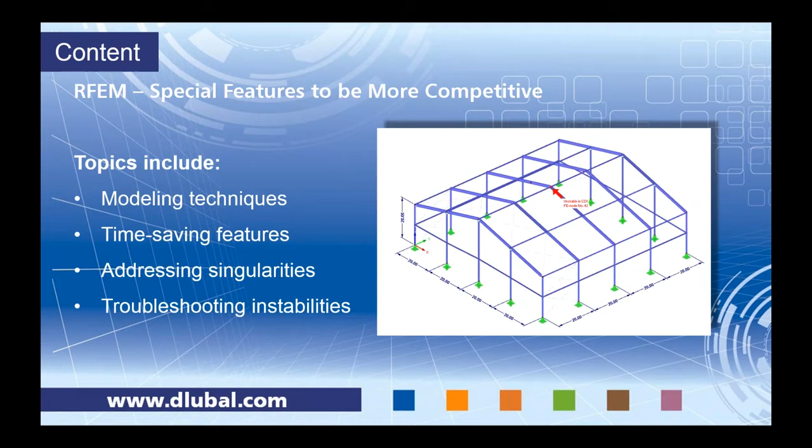I don't think there's a single engineer out there who has modeled that hasn't encountered an instability of some sort. So today I just want to show you some features in RFEM that I think help you troubleshoot these instabilities and overcome them quickly.

So for our first example today, I just have a simple frame here. If I scroll in, you can see our W shapes for our columns, W shapes for our beams, nothing too elaborate. It's restrained in the out of plane direction. And I went ahead and applied some line loads here.

Dead load, we have 3 kips per foot. Live load, 2 kips per foot. And then I went ahead and put a wind load, a lateral load of 1 kip per foot on the structure. You'll also see here I have some load combinations that were just created according to the ASCE 7 using these 3 load cases. And then I also have my result combination. Result combination is nothing more than an envelope solution to give you the max and mins for all the load combinations that I have specified from the ASCE 7.

So with this result combination, I want to go ahead and run an analysis, and it tells me that the results are not found, so it's going to go ahead and run through all of those load combinations. And if I take a look now, I have a results option down here at the bottom of my Project Navigator tab. This is where I can actually control what I see graphically from my results. You can see here that right now I have my moments in the local Y direction displayed.

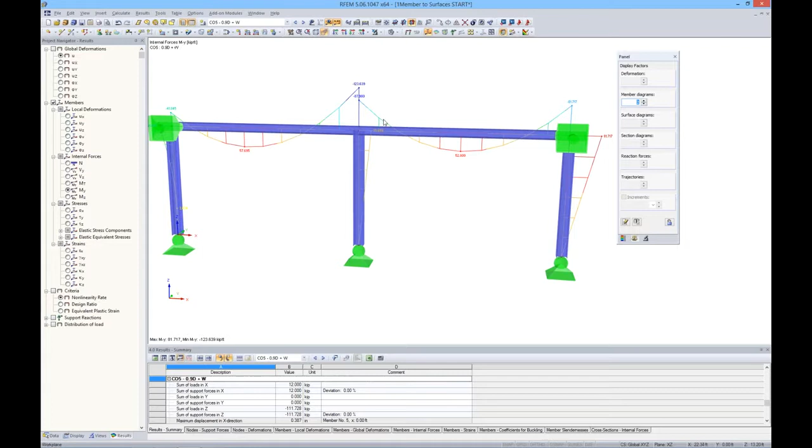We have a max and a min, and I can scroll through all of my load combinations here, and it updates according to which load combination was shown. I can increase my member diagrams here so you can see them a little more clearly, and we can take a look at our axial forces, maybe shears, and stresses here.

The other thing I utilize in this model is we have quite a few add-on modules. We have one called RF Steel Members, which is essentially a stress analysis of our steel members. I'm using the results from our result combination to get a stress ratio. You can see here that if I take a look at my colored panel list, my ratio is actually 1.11 at this intersection. For design purposes, this obviously is not okay. We can't have over 1.0, and in some cases maybe it's 0.8 or 0.9. You can see the rest of the beam is relatively okay, even at these other column locations at 0.75.

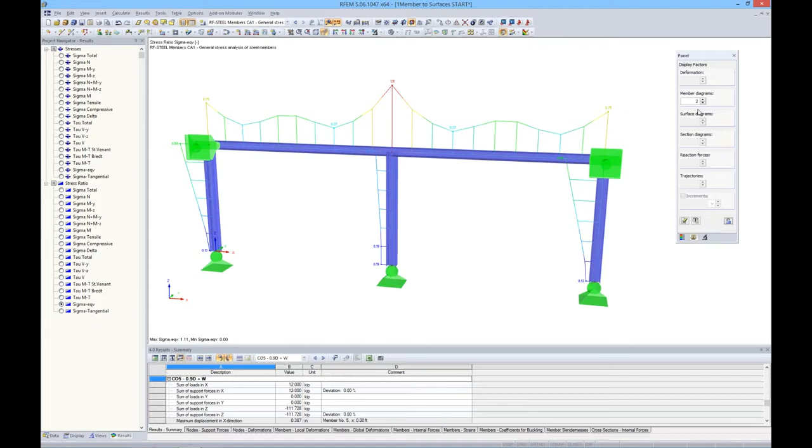If I decrease my member diagram, we can really see clearly where the problem area is. It's right at this intersection. So we have a couple options here. We can certainly increase the size of our members, but this can result in an over-conservative design because the only problem area is really this intersection here.

So what I'm going to propose is that we take a more detailed look at our intersection here with a finite element analysis. If I go into our wireframe view and turn off my results, we can see that our members are simply 1D elements. When you're drawing a member in the program, it will only be this line, which is the centroid of the section, as a 1D element.

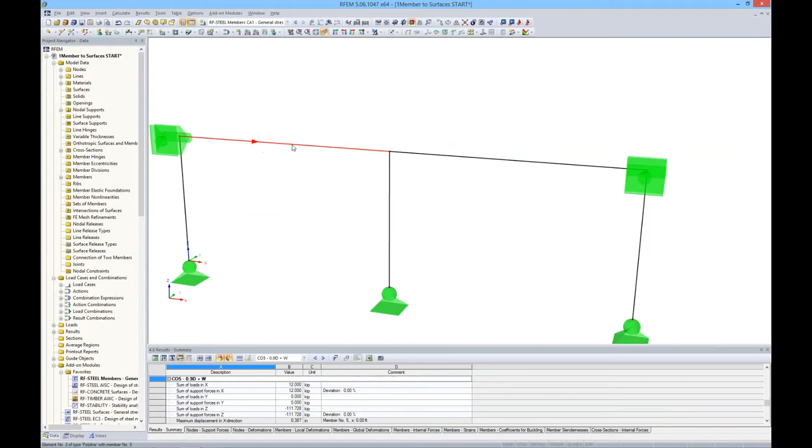I want to go ahead and divide this member here. All I need to do is right click on the member and go to divide member, and I have a few options here, but I want to divide by the distance. You'll notice this arrow here is going from left to right, so we know where the start and end of our beam is. I want to divide the member 2 feet from the end, and hit OK. Now you can see that I have 2 separate members.

You might be thinking, okay, what about the loads? What happens with the loads when you divide a member like this? You can see that the loads were also divided, but the program's smart enough to know to keep that value on the divided member as well.

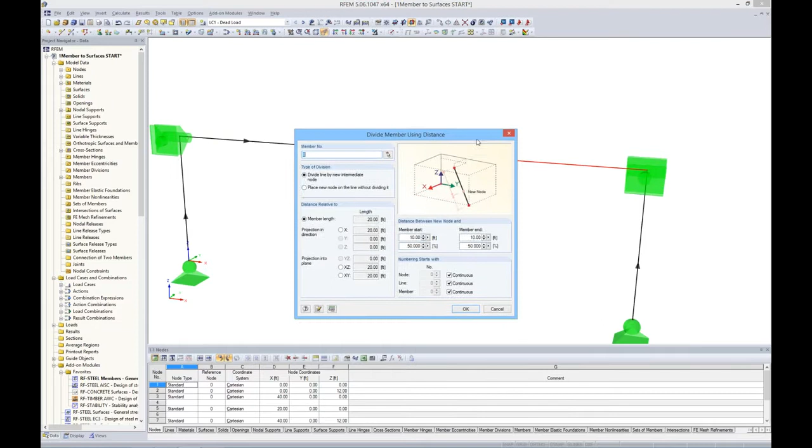So we want to do the same thing with this one. I will divide the member by end distance, and this time, because my arrow is going the other way, from start to end, I want to divide it from the member start by 2 feet. If I select this column and simply hit the enter key, the last dialog box will come up. That's just a quick tip rather than right-clicking on the member to pull up the dialog box again.

Now we have these 3 separate members right here. I'm going to render it again, and I'm going to select these. The selection is similar to AutoCAD: if I drag from left to right, it will only grab what's in that box. If I go from right to left, it will grab everything that box touches.

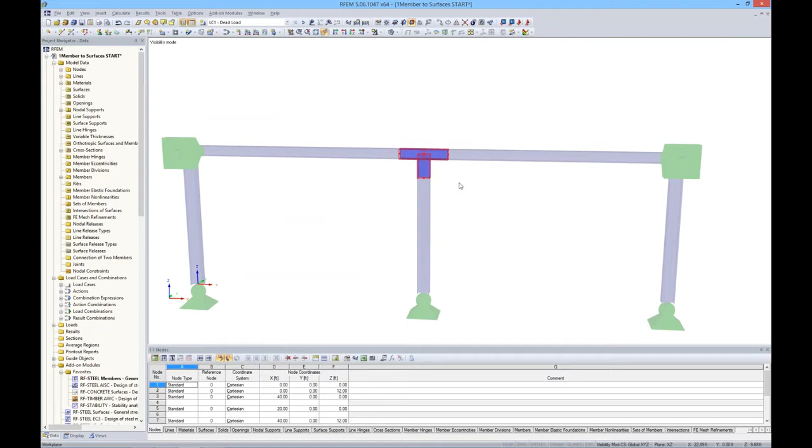For this case, I'm just going to select here, and I'm going to choose visibility by selected objects. Now I can no longer select anything other than these 3 elements that I specified before. This is a pretty powerful feature that RFEM has that I haven't seen too often. If I select my 1D members, right click, and go to my member, I can generate surfaces from members. Now you can see, let me put it in wireframe view, that these 1D elements are now surfaces.

So they're 2D elements now. If I go ahead and click on the web for this surface, you'll notice the thickness is 0.38, steel A992. All of this is taken directly from the section that you specified, the W shape.

If I go ahead and select a flange down here, the thickness is 0.63 inches. So again, everything was taken from that W shape.

So you might notice here that we have some geometry issues. Obviously, this is not valid. So we want to move the flanges of the column to the bottom flange of the beam. I'm just going to hold down my control button and select all of these nodes at once.

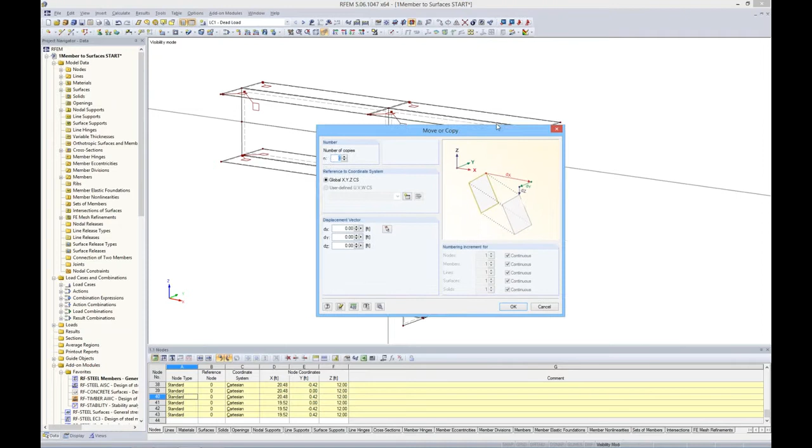I'm going to use our move copy tool, and I don't want any copies here, just moving. Typically I would need to know what this distance is to move these flanges down to the bottom flange of the beam. Maybe after a little while I could decide, okay, half the depth, take into account the thickness of the flange.

But instead, RFEM has this tool where we can select 2 points to actually get a displacement vector. So if I select from the top of the flange down to the bottom of this flange, you can see I now have a displacement vector on dx and dz. We will not be moving it in the dx direction, but only in dz. So I hit OK, and you'll notice that everything lines up quite nice.

Now, the other thing to consider is that we have this single point here where this 1D element is framing into the surface. This can actually cause a singularity. All of these forces are being transferred to this one particular point rather than being distributed over this entire surface. So what I want to do here is create a rigid plate at the end.

For our surfaces, if you go up to this button up here, you'll notice we have quite a few shapes you can choose from - donuts, semicircles, triangles, anything really, polygons - and the program will create this surface element and automatically mesh everything. There's no need to individually mesh the elements. Some other programs require you to tie nodes together, tie elements together, but the program will do this all automatically. So for this case, we're going to go ahead and choose polygon.

And for my stiffness, I'm going to choose rigid. Everything's grayed out because our stiffness is super high. So here we will just go ahead and draw our plate, and once we close the loop, we can see that we have a new element here.

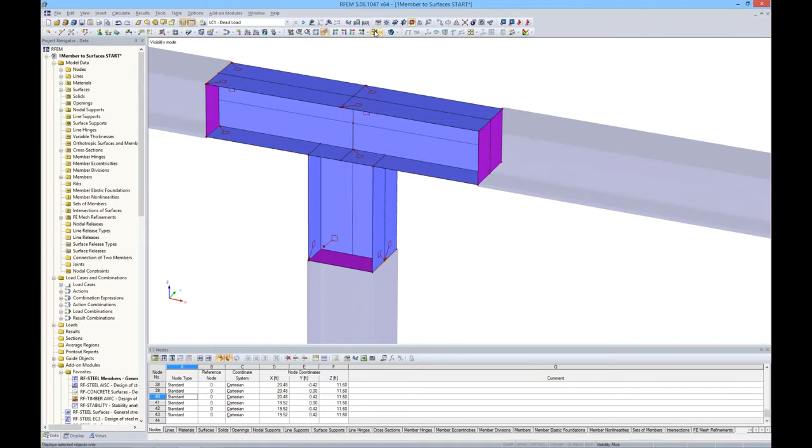We will do the same for this side, and lastly we want to do the same on the bottom of the column. And I right mouse click to get out of that dialog box. You can see now that if I go ahead and render my views and turn off my visibility mode, that everything lines up quite nicely.

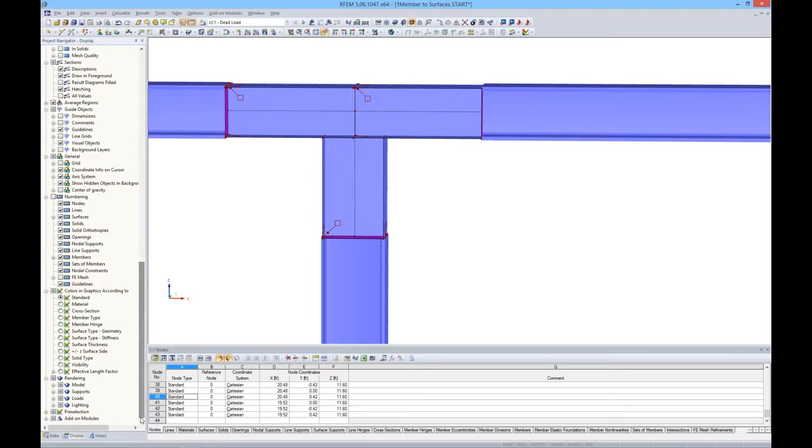Surfaces are only modeled at the center line of the thickness, so we do have the option in our display menu. This display menu is essentially everything you'll need to adjust your graphical view. If I scroll all the way down to the bottom, I have the choice for rendering the model, the solid model, surfaces, and I can actually fill including the thickness. Then if I zoom in, you can see that everything lines up with the 1D element to the surfaces.

I will go ahead and turn that off. Now the other thing I want to show you is the FE mesh. You can notice that the program has automatically inserted these refinements. For the sake of this purpose, I'm going to go back to our data and go ahead and delete these.

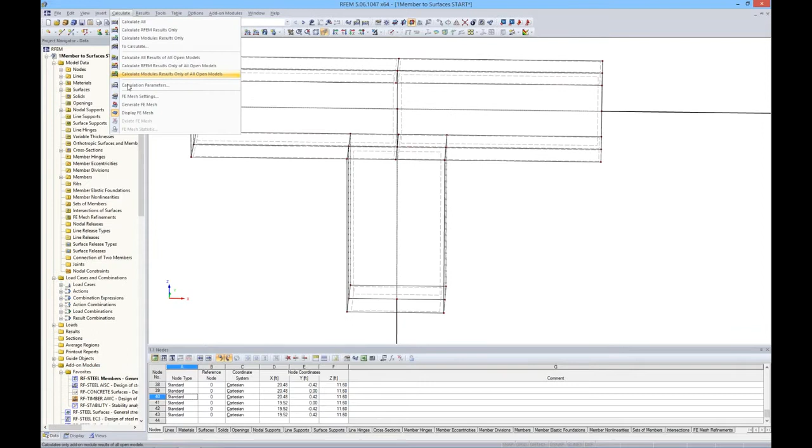Now, if I go to calculate FE mesh settings, and I think most people are familiar with this from FE analysis, you have to specify the length of your finite elements. Default is typically 1 foot. If I go ahead and generate that 1 foot, we can see that this is clearly too large for this situation - we only have one FE element for the entire width of this surface. So if we go to calculate FE mesh settings and change this to 0.1 and regenerate the model, we can see that this is much better.

The program ties all nodes and lines together automatically, so you don't need to worry about that. One last thing to consider is our loads.

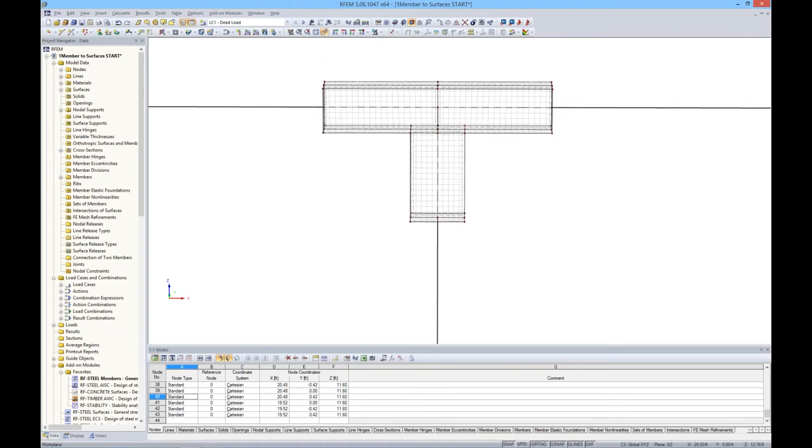For our dead load, as I mentioned before, we kept these 2 member loads, but in this case we don't have a member here anymore, we have a surface. So we need to delete these. I'll click on the load and delete them, and apply a line load instead.

A line load is very similar to a member load, except it can be applied to surfaces. So here we want to apply -3 kips per foot. I simply zoom in and click on my lines, and now you can see the 3 kips per foot has been added.

Now I want to adjust my live load. If I hold down the delete key and click on each load, that will also delete those loads.

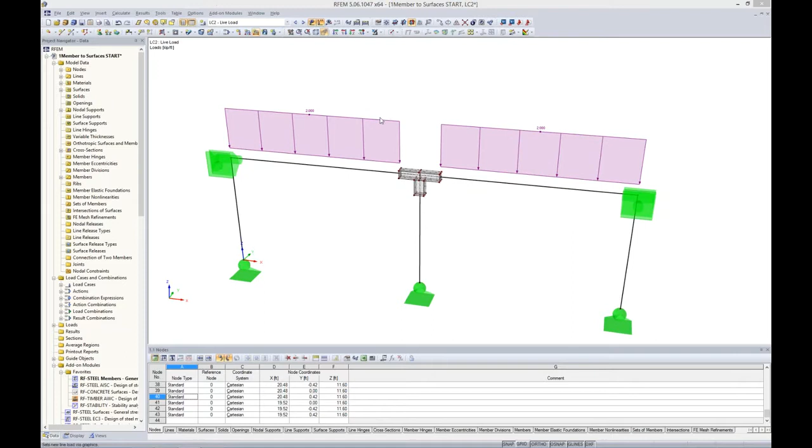Again I want to draw a line element, and because I'm in live load up here, that is the load case this load will be generated into. For this one, I'll specify it as -2 kips per foot. I just scroll in here, and now we have our loads.

I believe we're ready to run our analysis. I go to my result combination, and since results aren't found, our dialog box pops up. This will take slightly longer than our 1D elements because we now have the 2D surface elements, and you'll notice it's going through each iteration as the load increment increases.

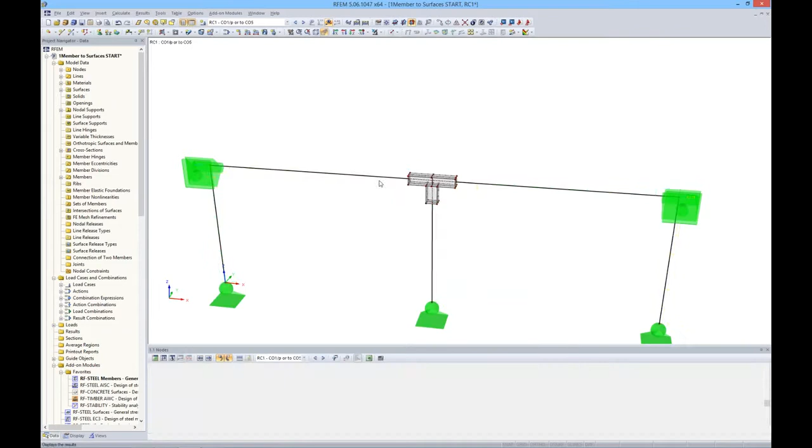So instead of the members, which you'll notice the member diagram stops short of those surface elements, that's fine, I'm going to turn that off and take a look at our surfaces. If I scroll in here, I can view all the different internal forces for the member, shears, moments, everything of the sort.

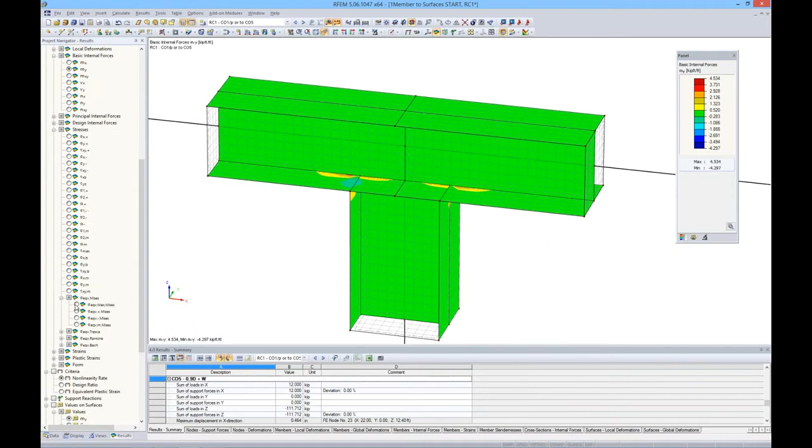What I'm really interested in is the stresses, so I'll view the von Mises stresses. Everything looks okay until I zoom into these points, where we can still see it's extremely overstressed.

So we have an option here where maybe we want to add a plate to this bottom flange, maybe an inch plate.

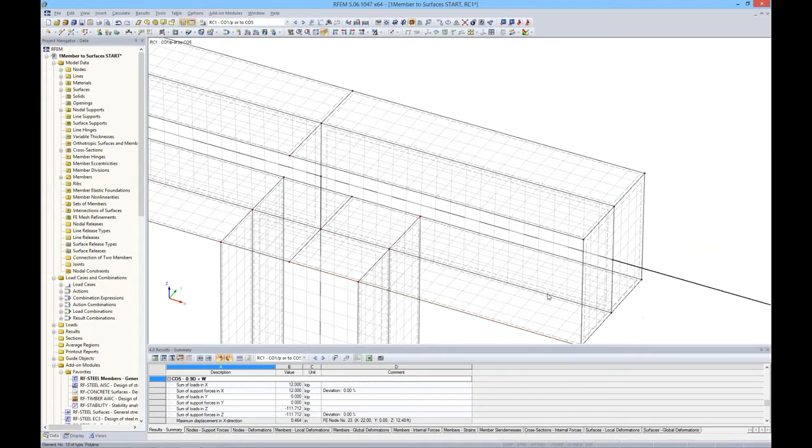If I turn off my results and hold down, select this surface, and hold the control key, I can select all of these bottom flanges. Now I can right click... oh sorry, I lost it, let me do that again.

Now I can right click, edit surface, and increase my thickness to 1 inch. In the rendered view, we won't see that unless we change it to the thickness under our display options, and you'll see it's slightly thicker than our 1D element, which is exactly what we want. I'll change it back to here.

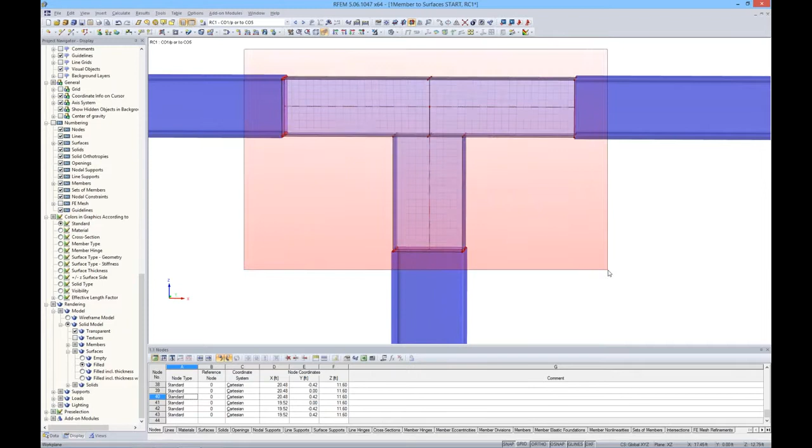Now the other option is to actually do a plastic analysis. With our add-on module, MatNL, which takes into account nonlinear materials, we can select all of these, right-click, edit our surface, and create a new material.

I go into my materials dialog box, and you can see the library is full of quite a few materials. We can filter them according to metal, steel, ASTM, but more importantly we have this favorites group option, where you can save the ones you use most often. For me, I created one for USA, and I'll use steel A992.

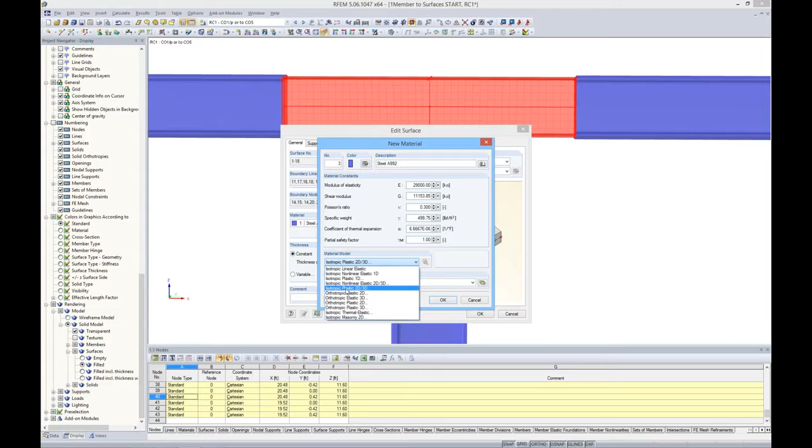Now the material model default is isotropic linear elastic, but for this case I want to use isotropic plastic 2D, 3D. Up pops this other dialog box, where you can see our stress strain diagram, our yield stress here of 50 KSI automatically filled out, and our strain hardening modulus.

So here I can go ahead and click OK. Everything looks fine with that. I hit OK, and I hit OK once more.

If you're not sure if the material is different than the rest, you'll notice I'm in my table down here with steel A992, which is isotropic linear elastic. As I highlight the field in the table, the members themselves will highlight as well. This blue one just means it's not currently being used. The steel A992 plastic 2D and 3D were actually applied here.

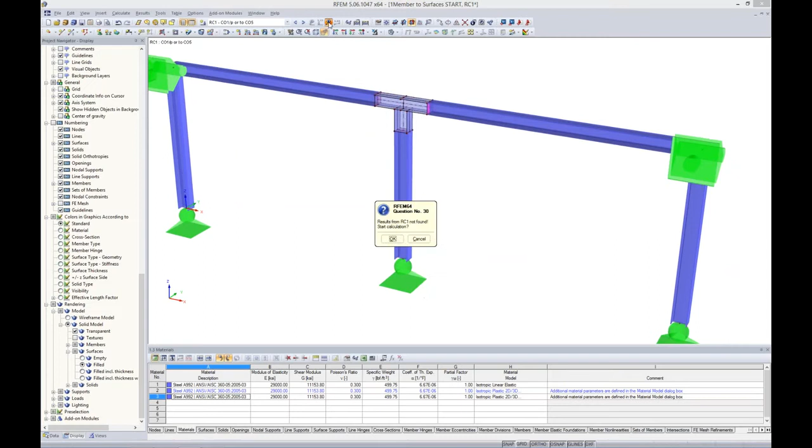Okay, so I want to go ahead and run my result combination again. This will take slightly longer than the last one because now it's a nonlinear material, and keep in account that the size of your mesh also matters for your finite element analysis.

At some point, the smaller mesh you go is not going to change your results. So what I'd suggest is to keep a mesh that doesn't create a super long solve time but will still give you accurate results. You'll notice that if you decrease the mesh size and solve again, your results won't change by much.

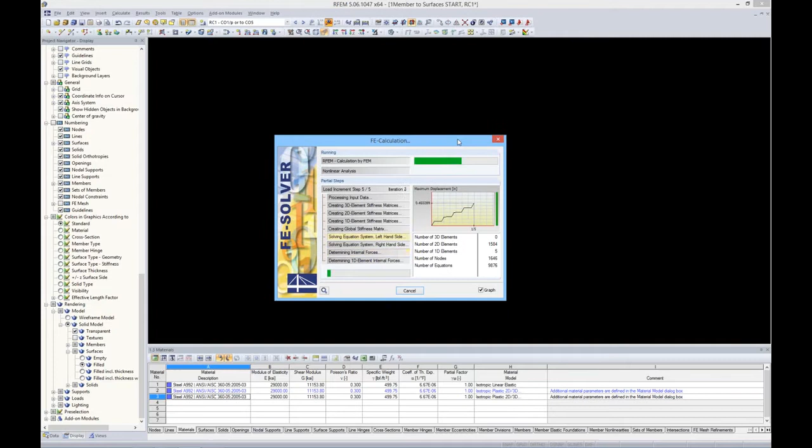We also have this graph here that shows the maximum displacement as the program is cycling through each iteration. So as soon as this is done solving, which will be just a second longer—again, it's just because we have a nonlinear material.

Now I want to take a look at these contours. Each FE element actually has a value at each corner, and what the program is doing is using a smoothing algorithm to tie all of those values together and create a nice smooth diagram.

Under my display tool, if I scroll up to results, I want to choose constant on elements. What this does is average out the 4 values for each FE element, so you can look individually at each one. You'll notice that nothing exceeds 50 KSI, which is our yield stress—exactly what we'd expect.

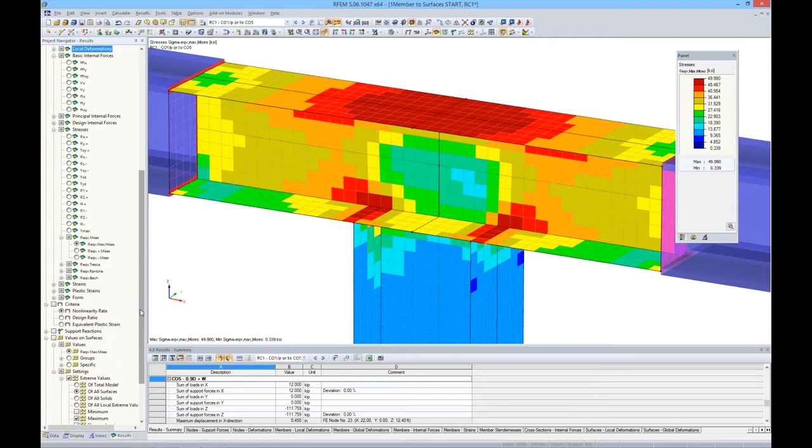So that concludes our first example. I want to move on to our next one, which again is very simple—just a continuous timber beam, three spans, nothing too special about it. But actually what's going on behind the scenes is quite powerful.

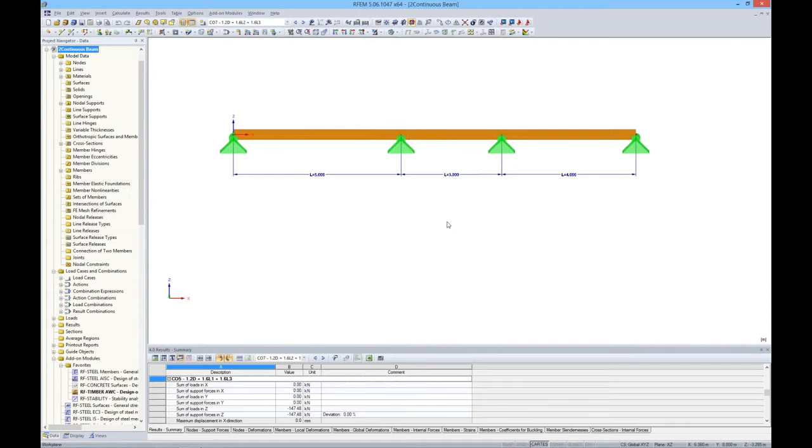The purpose of this example is to show you the use of parameters, or parametric modeling. If I go to edit parameters and move this dialog box down, you can define a variable in the program and use these variables in an equation to change span lengths, loads, angles. There are quite a few options—we can change areas, angles, surface thicknesses. I'll get into that in a minute.

If I type in 2 meters here, and for my B length, which is my second span, I'll type in 5, and for my C length, I'll type in 3. I hit apply, and you'll notice everything is updated.

Supports moved, and I also want to show you that if I look at my dead load, everything was adjusted with the loads as well. We have separate live loads on each of these spans, and those were all updated too.

Now let's say I want to edit my live load to -2 kilonewtons per meter. I hit apply, and you'll notice the live load was updated. So you can understand the benefit of using parametric modeling for a company that creates a lot of the same structures, but with geometry or loads changing slightly—you can use parametric modeling to deal with similar structures and improve your efficiency.

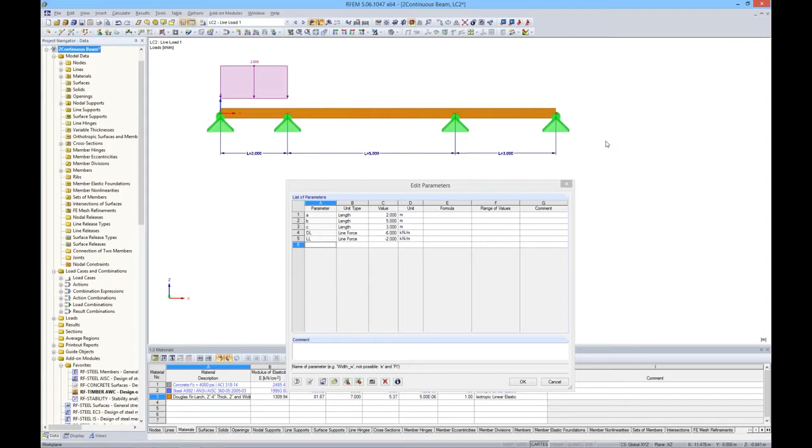Now the other thing I wanted to show you is, I created quite a few load combinations from the ASCE 7. If I take a look at my result combination, it's asking if I want to run the calculation. Yes, so this is just finding the max and mins of all those load combinations.

Now I want to take a look at my support reactions. You'll notice as I scroll through them, my support reactions are changing according to the different loads that I have. Now I want to show you our print report option, including these parameters. I think RFEM has quite powerful print report options compared to a lot of other software I've even used in my design career.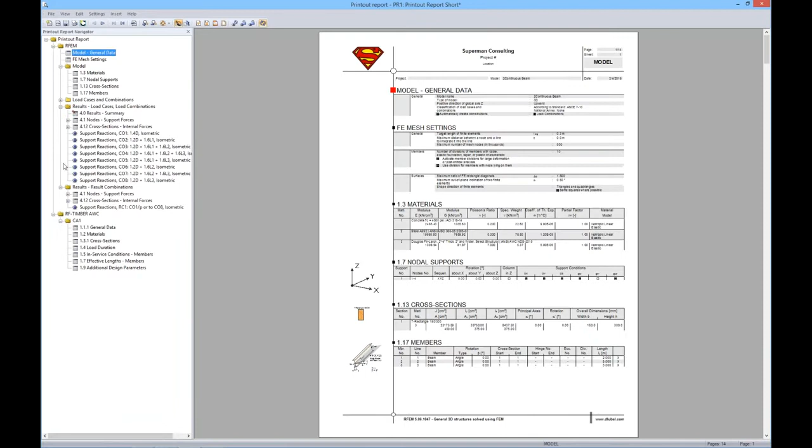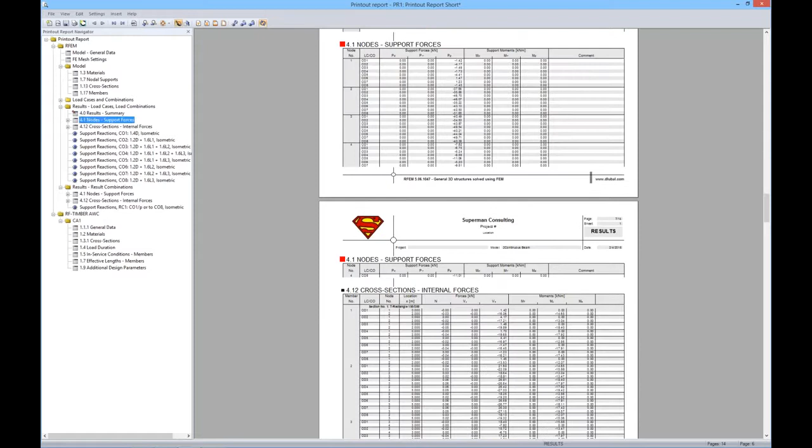If I go ahead and open up a printout report, one I created previously, a separate dialog box will open. You'll notice on the left are our table of contents, or report navigator. I can click on these and our report will update according to where I am. The same goes for here. I can keep scrolling down and the table of contents will also update.

I went ahead and put in some pictures of our support reactions, and you can see this is reflecting our spans that we currently have, which is 2, 5, and 3, I believe, for each load combination. If I zoom in here, I can see load combination 3, my support reactions, my max, my min. Everything has nice headings, very clear. But let's say my beam just changed all of a sudden.

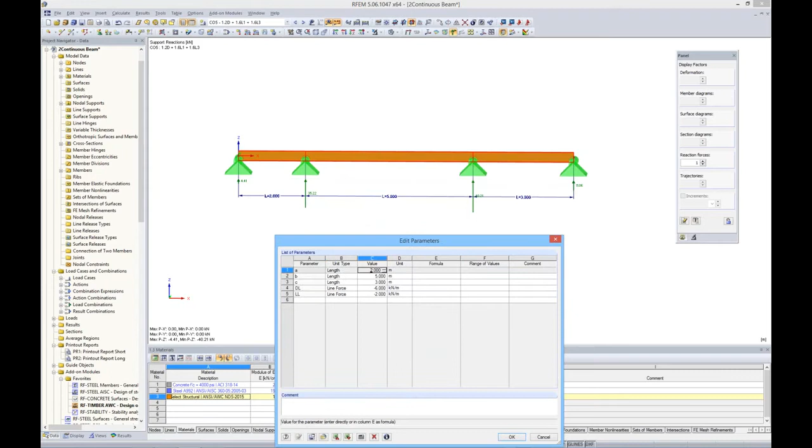So I'm going to exit out of this print report. No, I don't want to save it. I'm going to open up my parameters, which, down here in my table under my first model data tab, is a quick link to my parameters. Let's say I want to do 5 meters, 2 meters, and 3 meters. I hit OK, and you can see that everything was updated.

Now I want to go ahead and run the results again, and I go back to my print report. Now I want to jump down to these pictures, and you can see it looks like we are missing our support reactions.

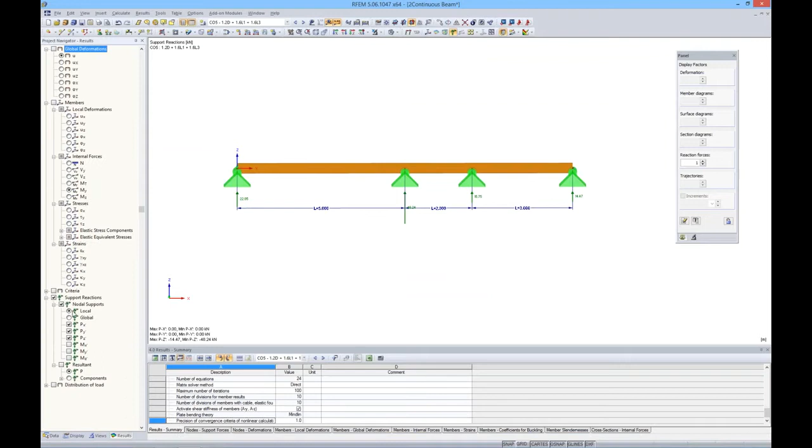Well, regardless, I think we can see from our results here that the support reactions are shown, and it looks like they're shown here. It should go ahead and update in our printout report. I'm not quite sure why, but regardless, the geometry is taken into account, and everything in the print report will be adjusted according to the changes you just made.

I can showcase this further with the printout report by taking a look at our members. I'm going to turn off my support reactions and just view my moment about the y-axis. Of course, as I scroll through - oh, that was probably the issue, I didn't run a result combination. So again, this is just an envelope solution of all the load combinations, and I think that's why the print report didn't show up, because I didn't run all of them.

I can scroll through each load combination for the moment about the local y-axis. I go ahead and increase these, and let's say I wanted to print off this moment for each load combination. Typically, you would have to take a picture or graphic, insert it into your PDF print report, go back, change the load combination, and do the same thing.

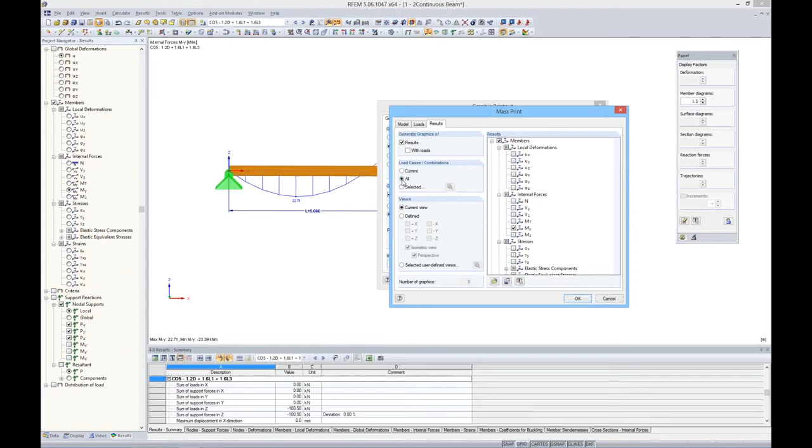But we have an option in here called mass print. If I go to my print option, graphic printout, I see the mass print here. I can hit these settings, and I have 3 tabs that pop up: model, loads, and results. I'm currently in results, and the program knows I'm looking at the moment about the y-axis. But for my load cases and combinations, instead of the current one I'm in, I'm going to select all. I hit OK, I hit OK, and now the program's cycling through each load combination for my moment about the y-axis, and it's going to insert those into this print report automatically.

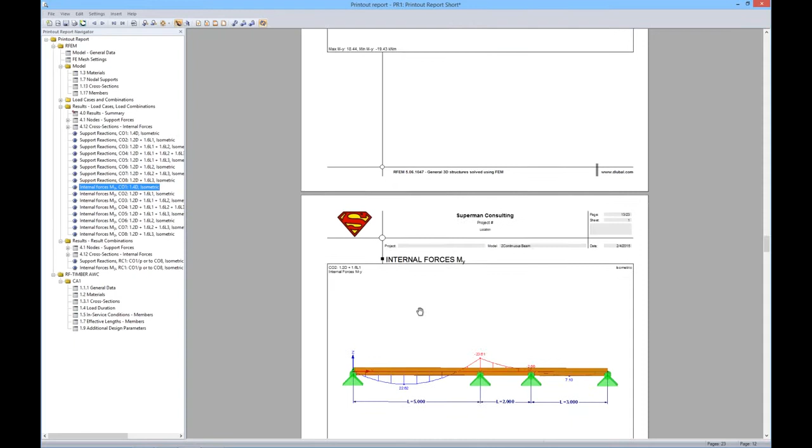So you can see now that my support reactions were updated, I just needed to run my result combination. But if I scroll in here, I can see I have load combination 1 with my moments, showing my max and mins. Scroll down, load combination 2, load combination 3. Everything is done automatically, so I think you can imagine how much of a time saving that is when you can use this mass print option.

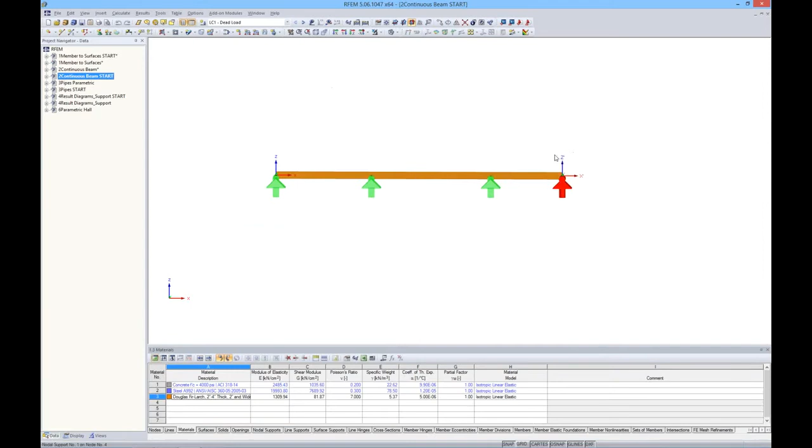The question is, with parametric modeling, how do we actually incorporate these parameters into a model? For the sake of time, I've already created this simple beam and applied some loads on it according to dead load and live load.

I want to go ahead and edit my parameters. If I type in A for my first span length, the length automatically pops up, and we'll do 3 meters. B for my second span length, we'll do 5 meters, and C for my third. Notice nothing in the model is changing right now - I'm just defining what parameters I want to have in the model. We'll go ahead and make this one 4.

Now let's say we also want to consider dead load. Instead of length, I want to go down - this is where there's quite a list to choose from for the parameters you can define: precambers, moments, stresses, time, mass, percent. We have quite a powerful option here. For this case, I'll go for a line force and do -4 kilonewtons per meter, and maybe my live load, again a line force, and I'll do -2.

Now that we have our parameters defined, we need to apply them to this model. So for node 2, we want to edit it. All I need to do is double click on it, and the dialog box pops up. My coordinate x here is just a static 4 meters, so I want to incorporate that parameter in there. I can click on this little box here.

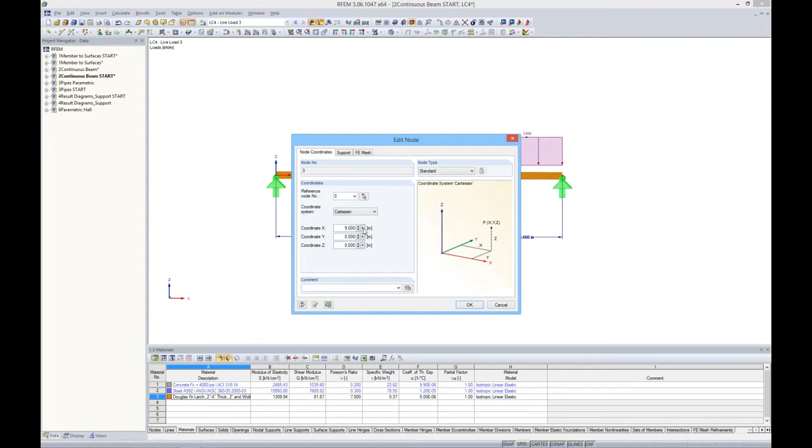I go ahead and do the same thing to this node - it's set at a static 9. I want to edit my formula, and I'll do A plus B, and now again it's dependent on those parameters. Lastly, for this one I'll edit my formula as A plus B plus C. So everything is now dependent on my A plus B plus C.

Now we also need to do the same thing for our loads. We can highlight all of these, right click, edit member load, and the same way we defined those node coordinates - for the actual value, I can use this arrow, edit formulas, and choose my dead load. I hit OK, and now that dead load is dependent on that parameter.

Now we just need to do the same for each live load. So instead of dead load, I'll choose live load here, hit OK, and do the same for each span - edit my formula, add my live load, hit OK, and lastly this one.

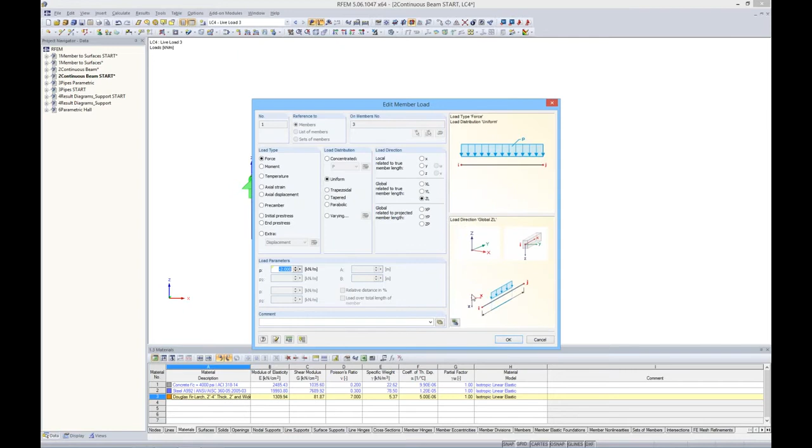Now if I go ahead and move this up and open up my parameters, I change this to 2 meters, 3 meters, 6 meters.

We should see that everything is updated just fine. For our live load, we'll go ahead and choose -6 and apply that, and everything is updated. So you can see that this is obviously quite valuable for a lot of the similar structures you're working on.

Or maybe it's the same structure and there's a lot of changes going on within the design process. So that sums up that simple model. We'll go ahead and move on to the third one. This one is a little bit more complicated FE analysis with our surface elements. I also created this model to have parameters in it as well. So you can see here I've defined my parameters, my angles, my loads within my pipes, which you can go ahead and define a pressure load within this pipe and maybe the spacing between.

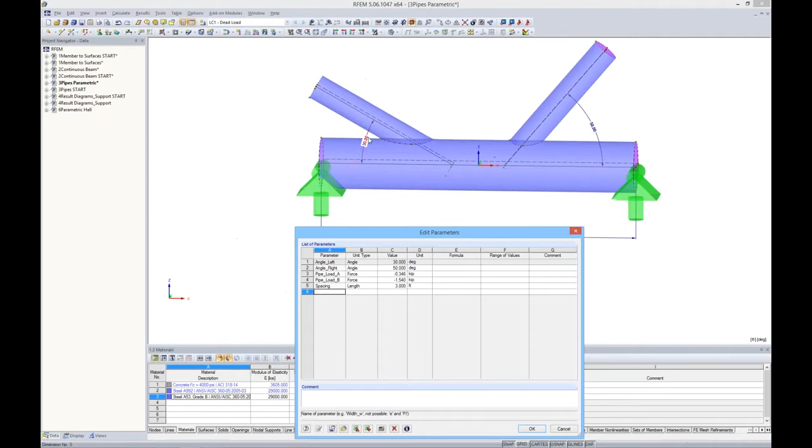If I go ahead and change this to 30 degrees and I hit apply, you'll notice that this pipe automatically changed to 30 degrees here. One thing to take note is that this is an intersection of surfaces. And you'll notice that when I changed this to 30 degrees, everything was updated. There's no need for me to change my FE elements. I don't need to go back and change the geometry. The program's smart enough to make all of those changes as I go ahead and adjust the model.

I can show you guys again, if you take note at this 50, I can go ahead and change my angle right to, let's say, 70 degrees. And I'll go ahead and hit apply. Again, everything is updated automatically.

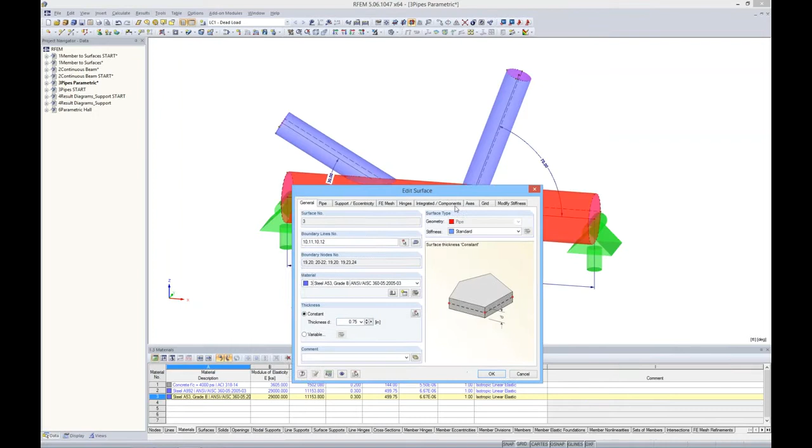I even have the ability to click here and right click to edit the component's parent surface. And we have a pipe option here. And I can change my radius to 2 feet. Again, everything is automatically updated. Those surface intersections are moved up and everything looks quite nice.

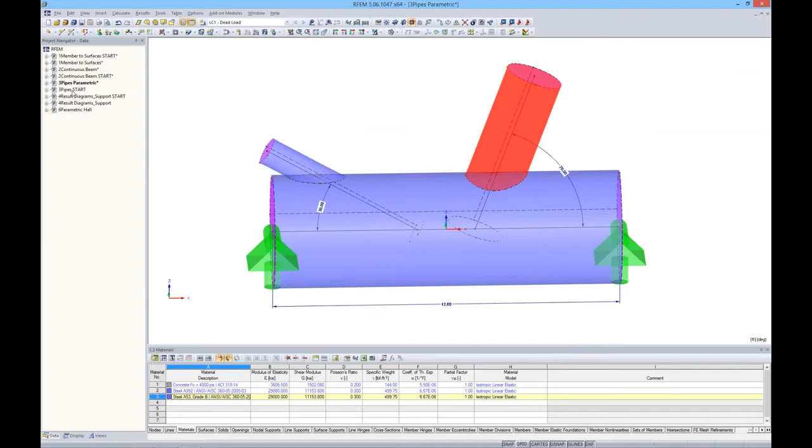We can do the same here. Maybe make this radius a foot, hit OK, and again, everything looks okay. So I want to show you guys how to go ahead and create this model and create an intersection of surfaces. So I'm going to go ahead and open up this beginning model, and all of these are just line elements. They're not members, they're just simply lines in the program.

I can define maybe members out of them if I wanted to, but in our case, I'm going to go ahead and apply a pipe surface. So I'm using these quick tools up here, and you'll see there's an option for pipe. Maybe my material when I first open it up is something like concrete, or maybe it's even timber, just something not applicable.

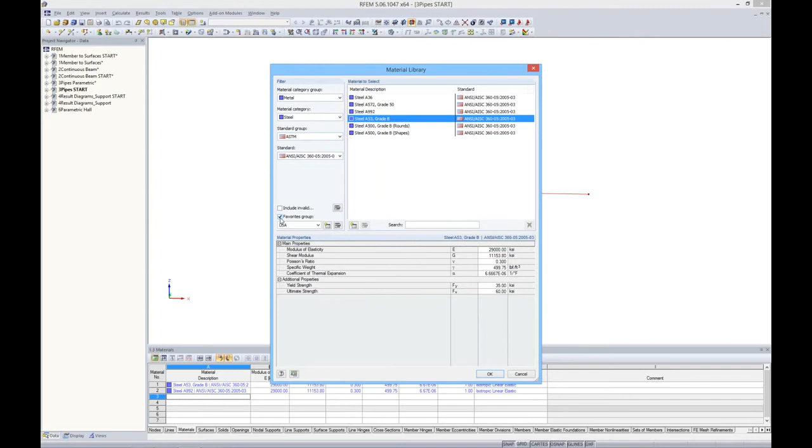So I can go in here to import a new material from my library. And again, for even metal, steel, ASTM, we have tons and tons of materials. I want to utilize my favorites group again, and I'll just go ahead and choose my steel A53 grade B. My thickness for my pipe, we'll just go ahead and set that to 0.6 inches.

And now we need to go ahead and click on the pipe tab up here and choose our radius, which we'll just do 1 foot. Now you'll see that the program automatically applied it to this line because I had it selected when I went into that dialog box. I want to go ahead and do the same for these two elements.

So I can go in here to my pipe surfaces again. And again, you can hit the enter key and it will bring up that same dialog box, which is a little bit time saving. For my thickness here, I just want 0.2 inches, and my radius, I'll go ahead and set it at 0.5 feet or 6 inches for these smaller strut pipes. Then all I need to do is just click on those lines and everything's created.

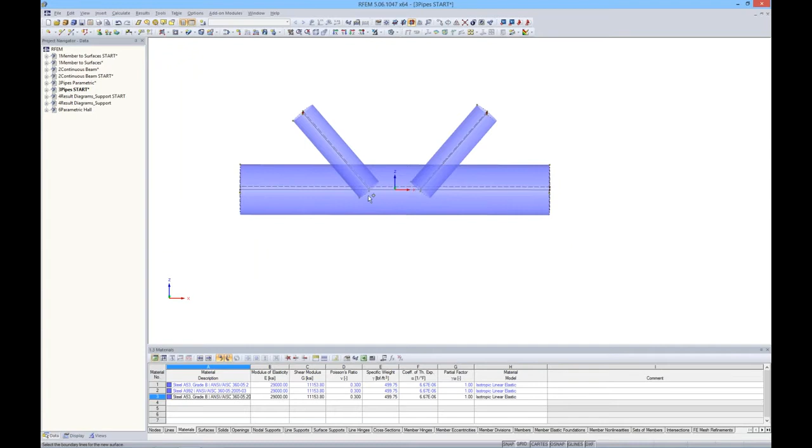Now, you'll probably see that we have some issues with our geometry. Same thing as the first one, we have some intersections here that we need to take care of. So what I actually want to do is to select everything, and I'll right click, and for my surface, I want to go ahead and create an intersection. And the program will automatically intersect all of these surfaces that I have selected. Now they're all just surface elements, but again, we need to take care of this geometry.

So I'm back in my data navigator for this model, and I can actually go to my surfaces here. And if I expand my surfaces and I click on them, you can see as I scroll down the list that it's actually highlighting each element that I'm clicking on in the graphic view. So we get to this component right here, and we do not want to consider this in our analysis. Typically, this would not be a realistic situation. So we can right click here, and we can actually deactivate the component.

So you'll notice here that it says inactive, and it's gone from our solution. I can go ahead and do the same thing for this one, deactivate, and I also have the ability to activate it again. But for right now, this is exactly what we want.

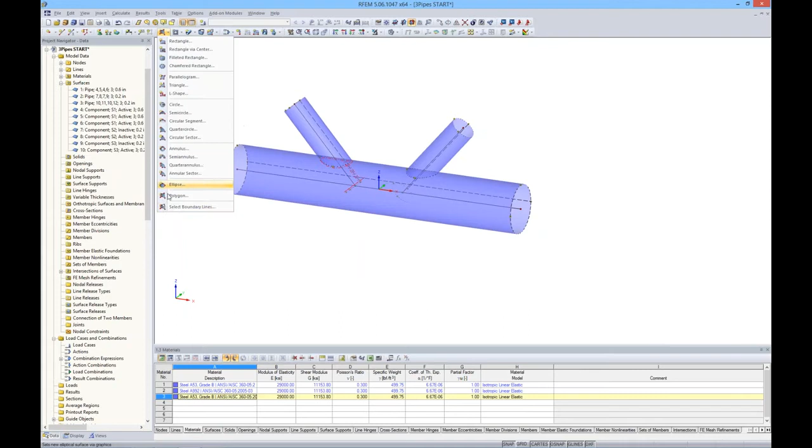Now, just like the first model, we need to go ahead and create some rigid end plates here. Instead of the polylines, I'm going to go ahead and select a boundary line. I want to go ahead and select rigid here, and all I need to do now is simply select these circles. You can see how easy it is to apply surfaces in RFEM, it's just the click of a button. I can right click to exit out of that.

Now the next thing that I need to do is to go ahead and apply some supports. So I'm just going to click on new nodal support. Maybe I don't know what this is, so I want to go ahead and create a new one.

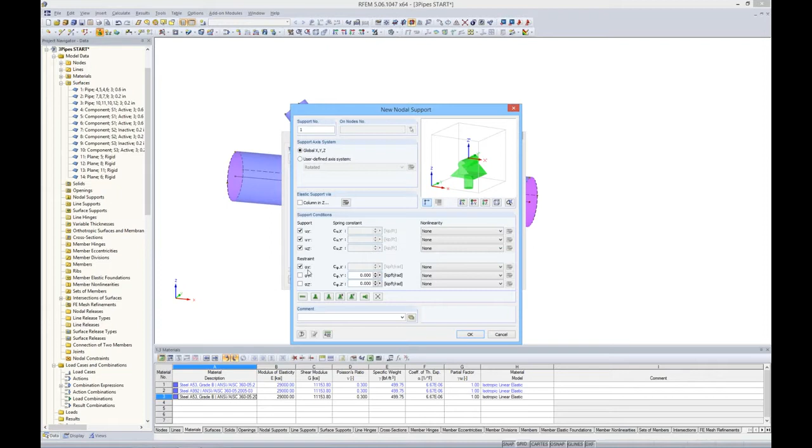You'll notice here that we have a lot of nonlinearities available. Maybe you have sliding, maybe you have friction, you can define your own diagram. So quite a few options here, or we just have the typical linear nodal supports. For my case, I'm just going to go ahead and restrain it in the X direction and in the rotation about the X, and then in the X, Y, and Z direction. I can go ahead, hit OK, OK, and all I need to do is click on these nodes.

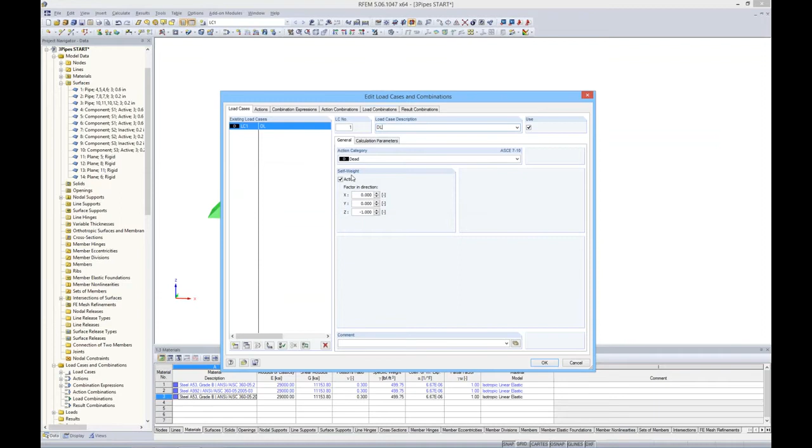So lastly, I want to just create a simple load case. Let's just do self-weight, so I'll call this load case description dead load, and I just want to activate self-weight. Now we just have this single load case, and we can go ahead and view our results by running the combination.

Actually, I forgot one thing I wanted to mention. Let me clear these results. You can see it right here, our FE mesh is not ideal, it's too big, and you'll probably find as you decrease this that your results are going to change.

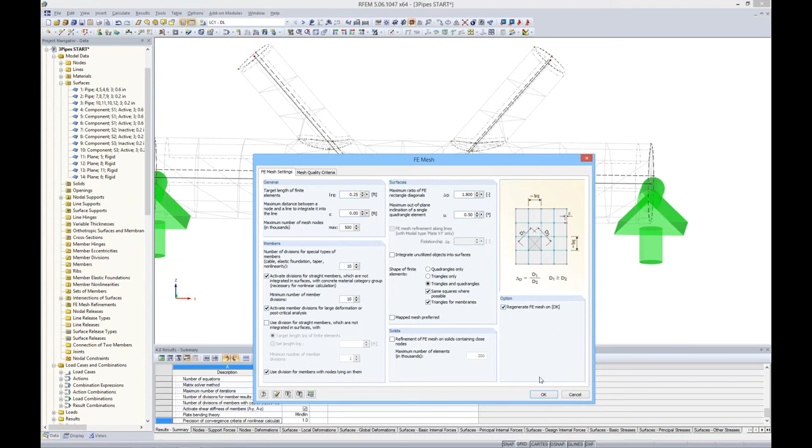So again, when I go to calculate FE mesh settings, the default is 1.0. For larger structures, this may be completely adequate, but for a smaller model like this, let's go ahead and change this to 0.25, and we'll regenerate our model. And that looks quite a bit better.

You also have the ability to go ahead and add an FE mesh refinement, let's say around this area, around the line. What that will do is actually decrease your mesh size only around this area without decreasing the entire model, which can significantly save on solve times.

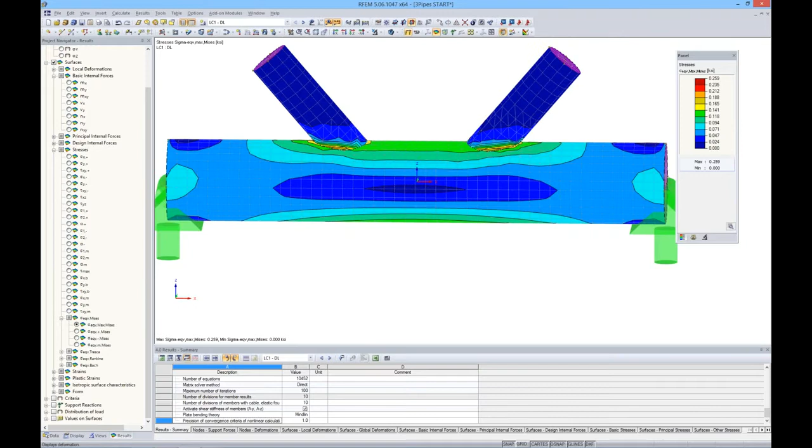So let me go ahead and run that analysis again now that we have a better mesh. We're only running dead load, so it should just take a second. Now we can see that we are viewing our von Mises stresses for the pipe. Again, similar to the first example, maybe we have some higher stresses here that we want to address. We can certainly view our deflections, which is actually only 0.001 because it's only self-weight.

So I'm not going to do the parametric modeling because we went over that in the last example, but you can see how powerful surface elements are in RFEM and how easy it is to apply them.

Okay, so moving on to our next example is just a typical foundation. It's a concrete foundation. If I go ahead and double click on it, I've defined it as 4,000 PSI concrete, it's 12 inches thick, maybe a foundation or an elevated slab, something of the sort.

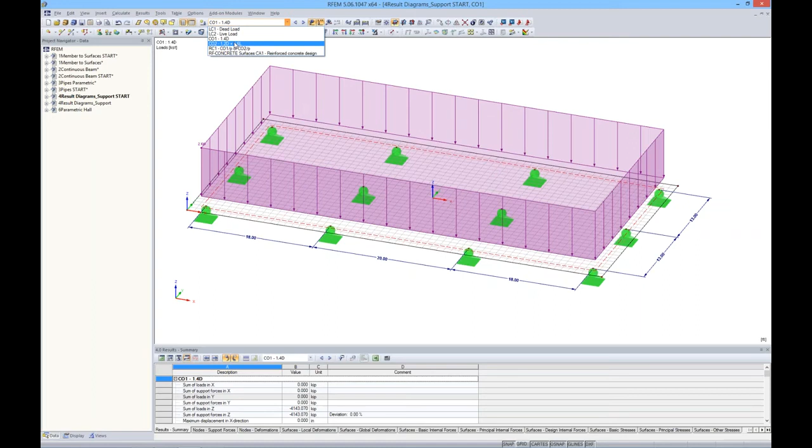I also have applied a few loads here, just your typical dead load in KSF of 1.5, maybe a live load of 0.75. And then I also have a couple load combinations here according to ASCE 7. Then I also have the result combination for the envelope solution.

Now I've also utilized our add-on module RF Concrete Surfaces. What this will do is actually tell you your reinforcement that's required according to whichever load combinations you choose. I went ahead and ran RF Concrete Surfaces according to my result combination because I want the max internal forces to be used for the design of my reinforcement.

So I can go ahead and solve here, and I already had them saved. If I go ahead and look at my ISO bands, I can see here from my RF Concrete Surfaces, and I'm looking at my required reinforcement.

I can zoom in. Everything looks okay except for these nodal supports—they look a bit high.

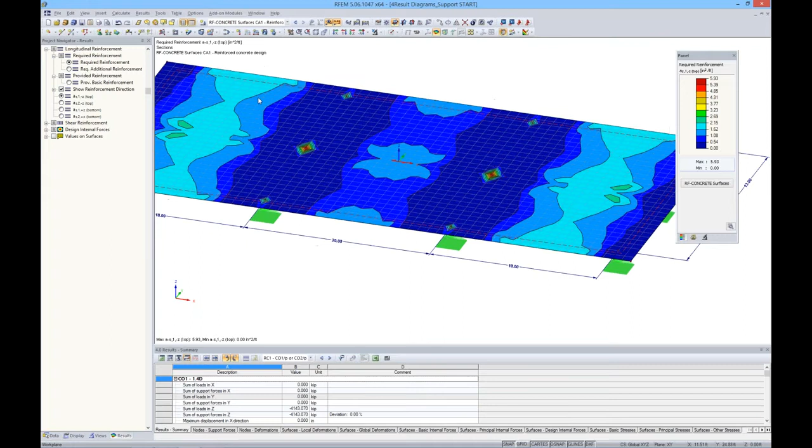I'll go back to my result combination and look at my surfaces. Let's check MX—you can see there's much higher moments at these locations of nodal supports. MY shows the same thing. Looking at stresses, there are very high stress concentrations at these locations. This was a situation of a singularity, essentially, that we want to address.

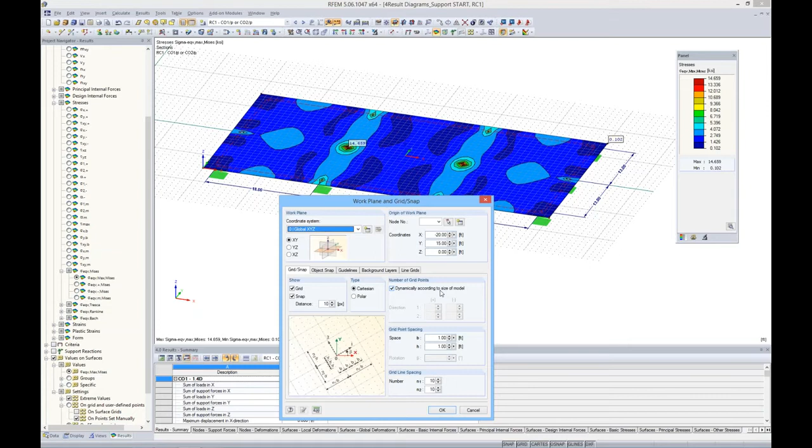If we don't address this, we'll have a much too conservative design for our reinforcement. So I'll turn on my grid—grid settings are down here—and snap that on. I can right click and hit edit; my grid is set up dynamically according to the size of the model, so it moves with me as I'm modeling.

We have a feature called define a section or results diagram. If I click on it and define a section right down the center where those nodal supports are, up pops this results diagram. This is essentially a section cut right through where I defined it, and you can see the values changing as I scroll over the length.

Right now we have deflection shown in inches, and down here are my stresses. Maybe I want to view the MY—you can see that everything is significantly high right here at this nodal support. So this is the singularity option that we want to address.

I can scroll through my load combinations and look at my required reinforcement—we're up near 5.93 inches squared per foot at these locations. Everything else is relatively low, so we do need to address this singularity.

I'll save this section as midsection so that once I exit out of here and turn off these contours, I can view my results as this saved section. I can scroll through load combinations to look at anything I want. So how do we deal with these singularities?

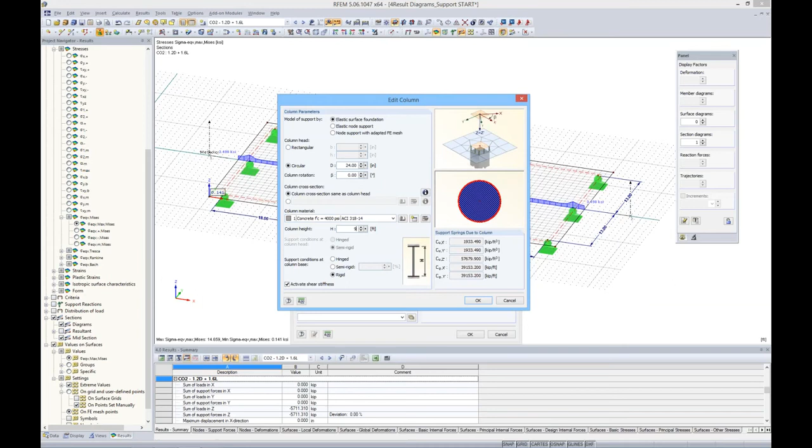If I hit OK, it asks me if my FE mesh will be cleared—do I want to continue? Hit OK once again. Now I can apply this to here, and you'll notice it looks slightly different—it has a radius here so that we're applying those spring stiffnesses to that support.

Now, if I go ahead and run my load combinations again, this will actually run the concrete add-on module to take a look at my required reinforcement. We can see it visually here—let me go ahead and turn off my grid.

If I go ahead and select midsection here, I right-click and go into my results diagram. Now we can see that it is undefined. We're only defining our reinforcement up to the surface of that column, up to the face of the column, which makes sense. This is typically what you would do.

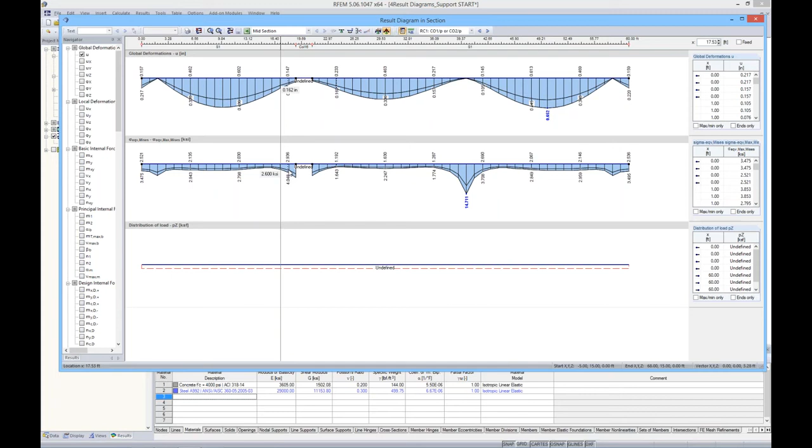Now we can see that the surrounding reinforcement required is much, much lower, but we're still looking at this singularity on the other node, which is exactly what I wanted to show you: how much our required reinforcement has decreased. So let's scroll back to our results combination. Again, deformations don't really matter, but our stresses are significantly lower at the face of the column compared to the single support over here.

If we want to take a look at MY, we can scroll down here. Undefined right here, still significantly high. So that is one way to deal with that singularity.

Now we have one other option. If I go to my data and expand on the model I am in, I can look at my average regions here. If I right-click and do a new average region, I can define my surface first, and then define where I want to average out these regions.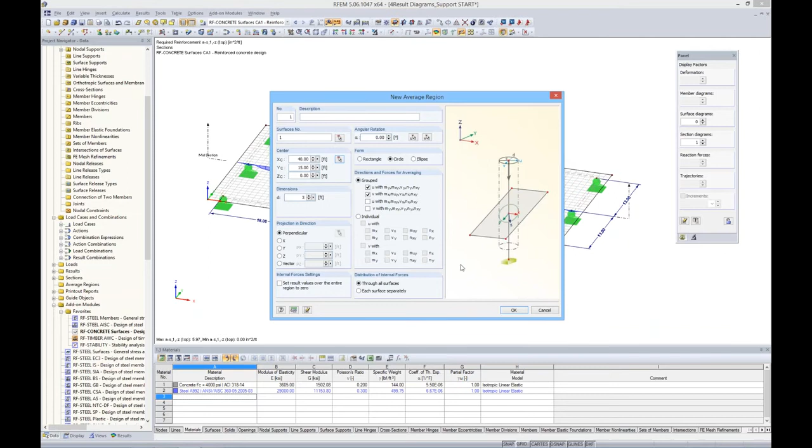All our internal forces will be averaged out within this 3-foot radius. I go ahead and hit OK, and solve once more. You can visually see here that our average region is shown. Now our reinforcement is down to 3.77 inches. Again, we can go to our result diagram and see that it's been reduced. It's still higher than the other one because we aren't defining anything at the face of the column, but it is significantly lower in comparison to where we were.

We can go into our RC1 and take a look at our von Mises stresses. Sorry, I have this other one shown here, but you can disregard that—much lower than what we were looking at before. We can also go ahead and add in our MX, much lower than what it was before.

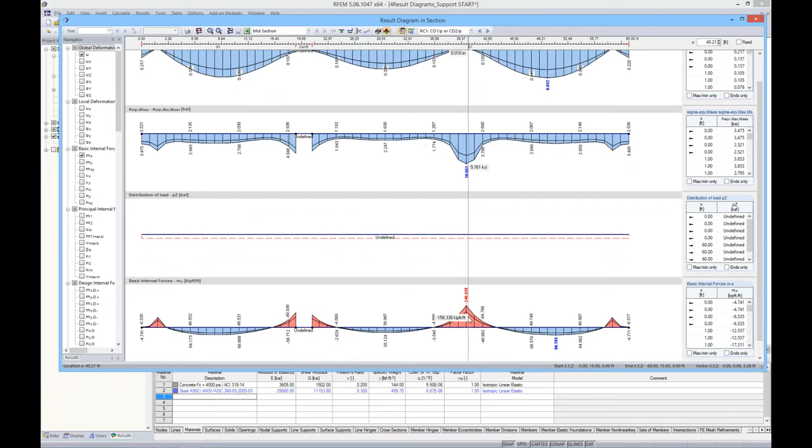The other quick thing I wanted to show you, if I turn back on my grid here, we have a powerful feature in RFEM called drag and drop. Let's say I wanted to copy this section over to here. All I need to do is highlight it.

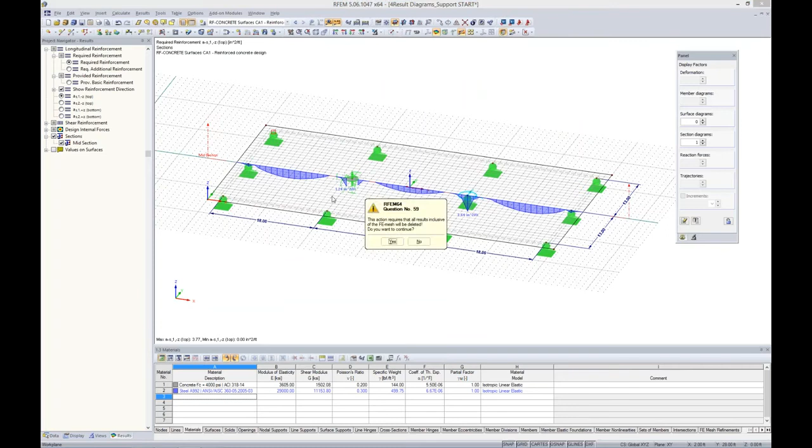I push down my control button, then just drag it and drop it, and now I have another section here. Let's say I want to do the same over here, and now I have 3 sections. You can go ahead and run one of these load combinations, and now you can see that I have these sections at all of these locations.

What I wanted to show you was that essentially drag and drop can be used for anything. Let's say I wanted to move this support here, or maybe the edge of this surface. I can simply do that—it's asking me if I want to clear my FE mesh. All I need to do is drag out the corner of that surface element, which is a pretty powerful feature instead of using the move option.

You can also click on something, hold down the control key, drag and drop it, and it's just a copy. You'll notice that my grid expanded with it. I can do multiple elements, hold down my control key, and move everything over to here. So all the dimensions and everything were moving as well, but you can understand how much of a time saver that can be rather than using the copy move tool every time.

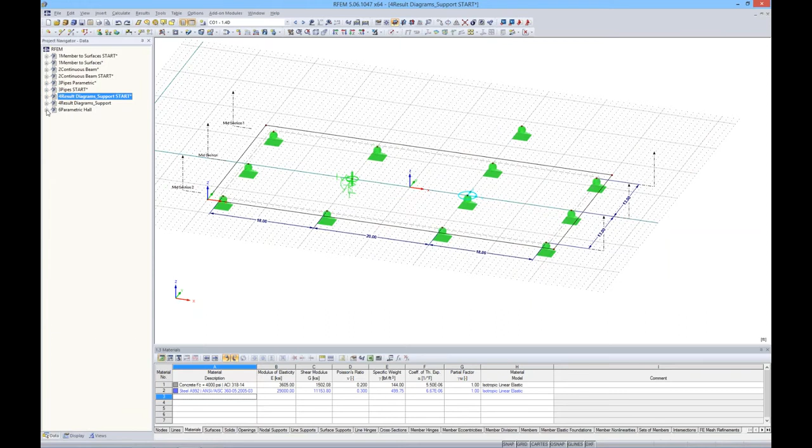So lastly, I want to move on to our last example, and we will go ahead and open up this parametric hall.

It's a simple hall, and to let you guys know, we have this under Tools to generate model members. You can create quite a few different structures here. The continuous beam I used for one of our examples earlier - I didn't showcase it, but it's possible to do continuous beams, and also more complex 3D frames. 3D halls can be created if I go ahead and click in here.

You'll notice that I can define all my geometries - it's laid out very clearly here in the picture. Any bracing that I may have, I can define my cross sections, and I would hit OK, and my 3D hall would be created.

This one is also based on parameters. Let's say I wanted this to be 15, and maybe another 15. And I go ahead and hit Apply. The FE mesh will be cleared.

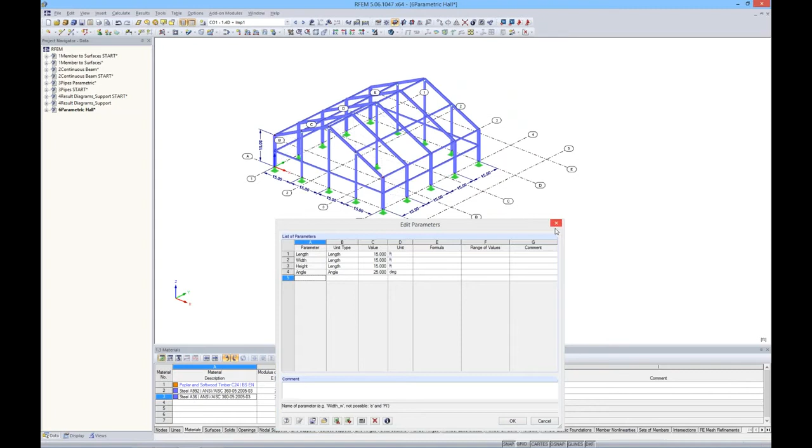Everything adjusts quite nicely. Let's say I want the angle of my roof to be a little bit higher - let's say 25 degrees. And I go ahead and hit Apply. Now the roof angle is changed. So again, just another use of those parameters.

I'm going to go ahead and undo this. Okay, so with this parametric hall, I went ahead and added in some simple loads. Again, we have our dead load, and now we have some snow loads on here, which I generated using our snow load generator.

If you go to Tools again, Generate Loads from Snow Loads, Dual Pitch Roof, ASCE 7 - you can see all I need to do is define the roof geometry and then the factors from ASCE 7. The program will go ahead and create three load cases: balanced, unbalanced, and unbalanced. It will automatically put them in as load cases into the program, which is what I did here. I have LC2 snow load 1, here's snow load 2, here's snow load 3.

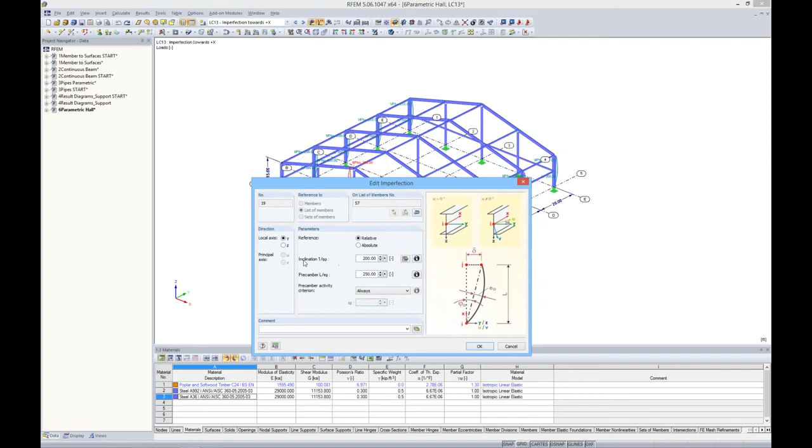And then I actually put in some imperfections here. Imperfections can be used for out-of-plumbness, maybe we have a pre-camber. I just wanted to showcase this to let you guys know that it's possible to take all of these into account. They're dependent maybe on the normal forces in the program, and everything is done automatically - you just need to define your inclination and your pre-camber.

I have my load combinations here according to ASCE 7, and it includes all of these imperfections as well. So let's take a look at this first load combination - it's just 1.4 dead plus my imperfection. I go ahead and run it, and it begins to run, then all of a sudden I get this instability - an error message.

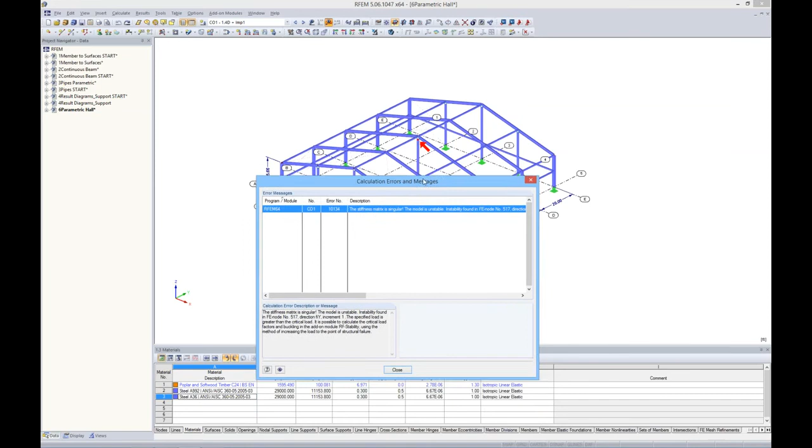As I mentioned, we've all seen these. However, down here in this explanation, it tells me the specified load is greater than the critical load. And what's really unique about RFEM is that there's actually a big red arrow telling you where this instability is taking place - that can be extremely helpful for large models. So it's telling me my specified load is greater than the critical load.

I say okay, now I need to go ahead and address this. So with load combinations, everything is run according to a nonlinear analysis, taking into account P-delta effects. But for load cases, they are run as a linear analysis - only load combinations will go ahead and apply those P-delta effects as nonlinear and adjust that stiffness matrix.

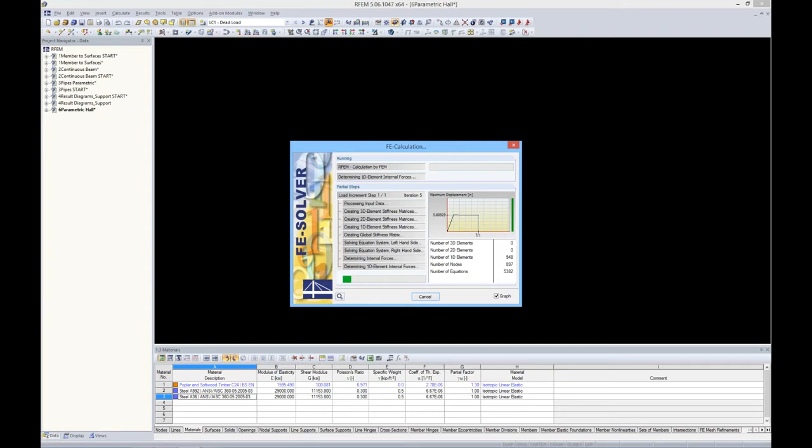So for load case 1, dead load, I want to go ahead and run it just to make sure maybe my geometry is okay, that I don't have any nodes not connected. And I go ahead and run it, and everything runs fine. You can see here that I have my results diagrams pop up for my moments about the local y-axis.

So, okay, it has something to do with those secondary effects. What I want to utilize here, which I mentioned to you guys before, is we have all of our add-on modules down here under our Data page - quite a few options to choose from. I added a few here to my favorites list, and what I want to utilize today is RF Stability. So if I go ahead and open up RF Stability, this will actually show you the eigenvalues graphically of the behavior of your structure.

Even if you can't solve it like I just showed you with that instability, we can go ahead and show the behavior of the structure and also the critical load factors, which you can multiply your applied load by before you'll see that buckling behavior.

For this case, I want to go ahead and set my eigenvalues to 4, and the load case that I chose is just my dead load. There's quite a few other options in here, but I don't really want to get into it today since it's a little bit more complicated.

So we'll just go ahead and calculate. Now the program is still in this add-on module, and we can see that we have our critical load factors for the 4 eigenvalues. This is purely interpolation, so the applied dead load I can multiply by 1.17 for this eigenvalue before it reaches its buckling behavior.

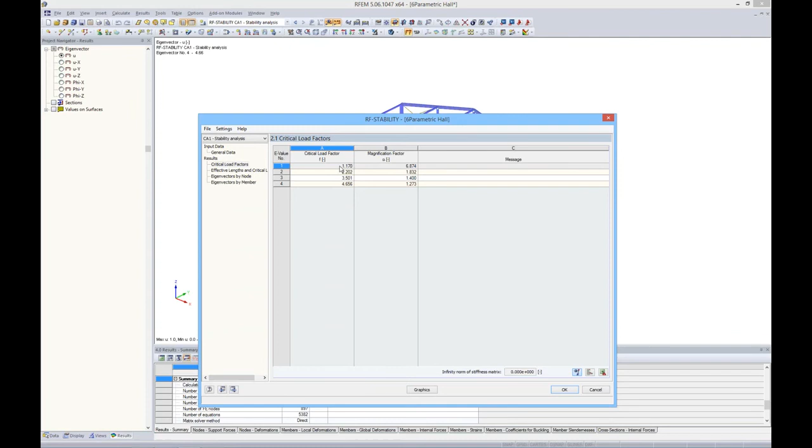If I go ahead and go to my graphics view and take a look at my first eigenvalue, and I go ahead and play this animation, well, we can see that this column here is buckling out of plane.

Let's take a look at the second one, and the whole structure is racking. If we take a look at our third one, it looks to be that column again, buckling in the other direction. And lastly, for our fourth eigenvector, still the problem column.

So what we want to do is address these columns in here. If I go ahead and select, let me turn off this movie, and I go ahead and select all of my columns. I hold down my shift key to make sure I've selected all of them, and I right click and go to edit my member.

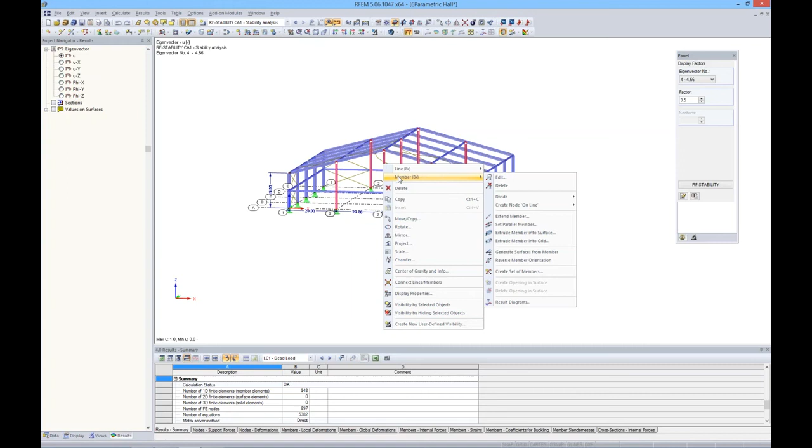Essentially most things you need, if you select something and right click, most of your options will be there. So for this one, I want to edit my member. I see that these columns are a W8 by 58, which is extremely small, so maybe we want to consider increasing the section size. I can just go ahead and modify here, and I'll again modify my shape.

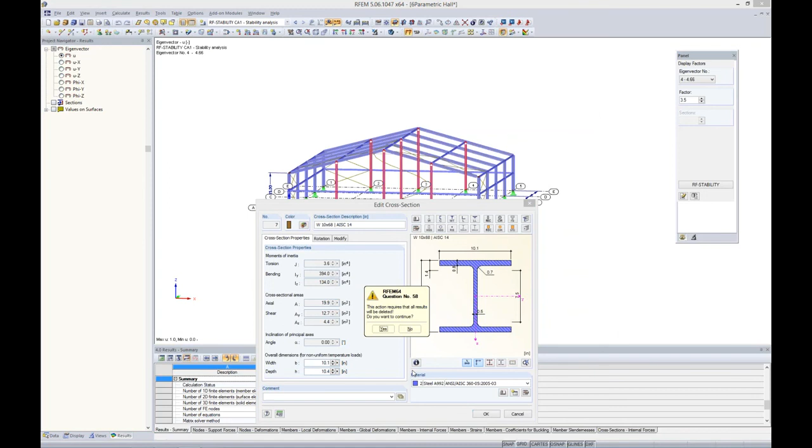And it brings up all of our cross sections. I have my favorites group activated, so I'm only looking at the AISC shapes. Let's say we want to go ahead and select a 10 by 68. Still A992 is fine, we can always modify that here as well. I hit OK. Do I want to clear my results? Yes, I do. And I hit OK once again.

So now I'm going to go ahead and run load case 1 with this new section size, and you can see now that we are getting results. So again, RFEM can be really useful in pointing out exactly where that instability is occurring. Not only that, it can be used for a stability analysis with RF Stability to show you your eigenvalues and critical load factors to address the buckling behavior of any members you may have in your model.